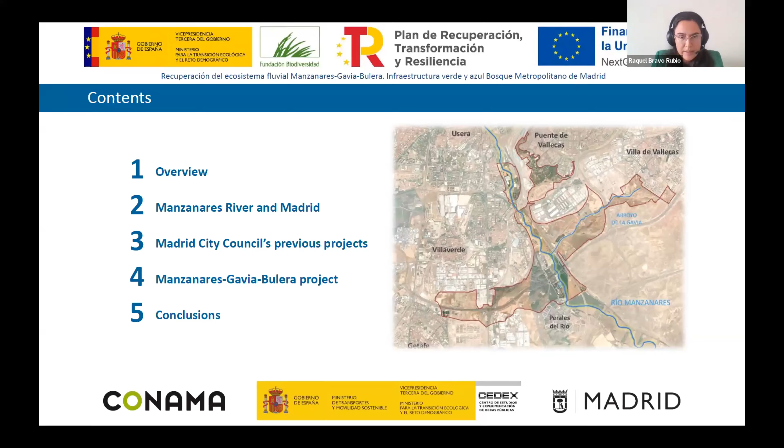Before presenting the Manzanares-Gavia-Bulera ecosystem restoration project in detail, I would like to briefly outline the structure of this presentation. We will begin with an overview of the city of Madrid, as well as its historical relationship with the Manzanares River. This background will help frame the significance of the restoration efforts made, and we will then move on to describe the project itself, and finally we will reflect on the conclusions.

Madrid is the capital and largest city of Spain, strategically located in the heart of the Iberian Peninsula. The city itself has a population of around 3.5 million inhabitants, while its metropolitan area is home to nearly 7 million people, making it the second largest metropolitan area in the European Union, just after Paris. Within the urban area, the municipality of Madrid boasts more than 6,000 hectares of green spaces, providing residents and visitors with extensive opportunities.

One moment, sorry, Raquel, your microphone is working a little bit badly. Is it possible to move it closer or to speak a little bit slower, because we are hearing you a little... I'm sorry, I'm going to move now. Do you hear me? Okay. Well, I think so now. I'm sorry, say a longer sentence.

6,000 hectares of green areas. Because you are falling a bit in and out. Is there a possibility to detach this microphone? I'm going to detach the microphone. Okay, I hope it works without the microphone. Sorry, thank you. Now, do you hear me? Much better, much better, thank you. Sorry, because we have been testing before the seminar, but sometimes problems happen.

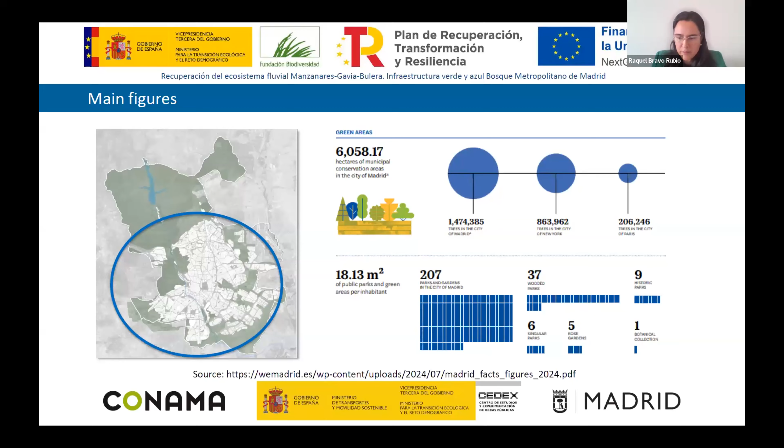Sorry, I will continue. I was explaining that in Madrid we have more than 6,000 hectares of green areas and 1.5 million trees inside the urban area. Outside we have more trees and more green areas.

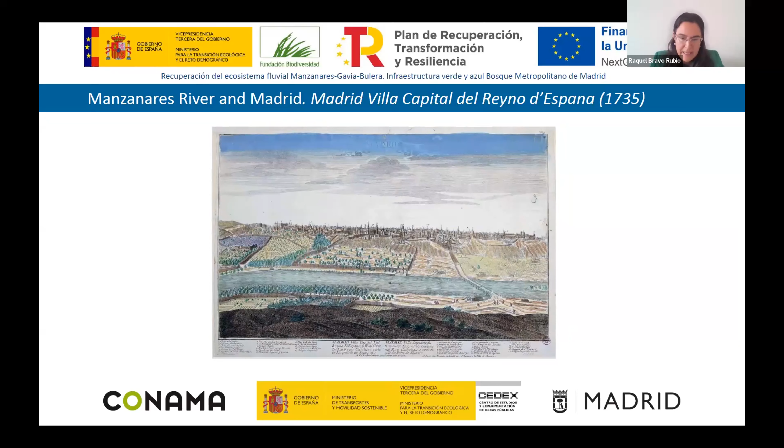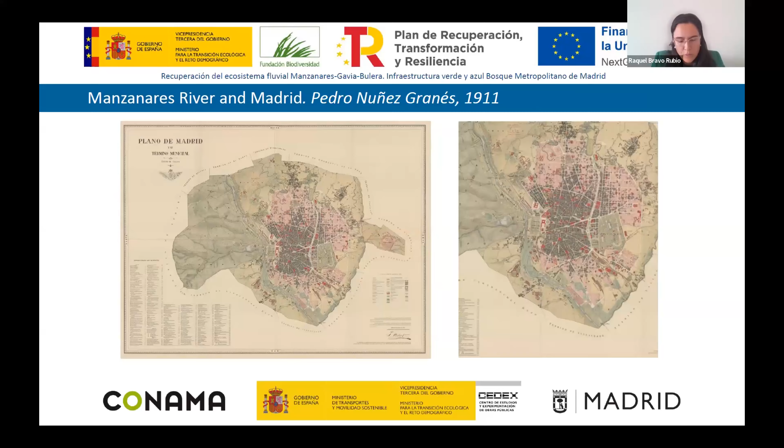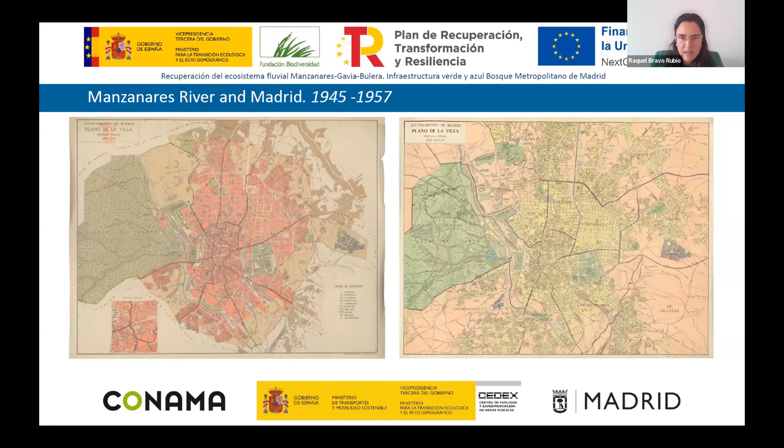Shown in this map is the early 20th century. The Manzanares River was still not fully integrated into the urban fabric of Madrid. This map illustrates the significant expansion of Madrid during the mid-20th century, when the city absorbed several neighboring municipalities. This period marked a turning point in Madrid's urban development, as the Manzanares River, which had historically remained on the outskirts, became fully integrated into the city structure, as you can see in these two maps.

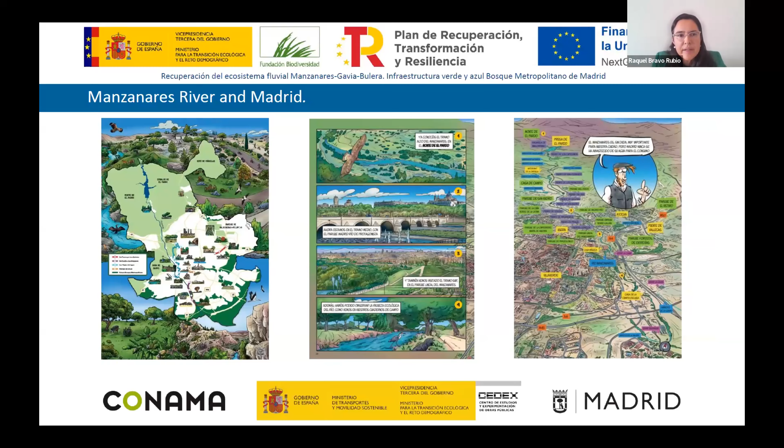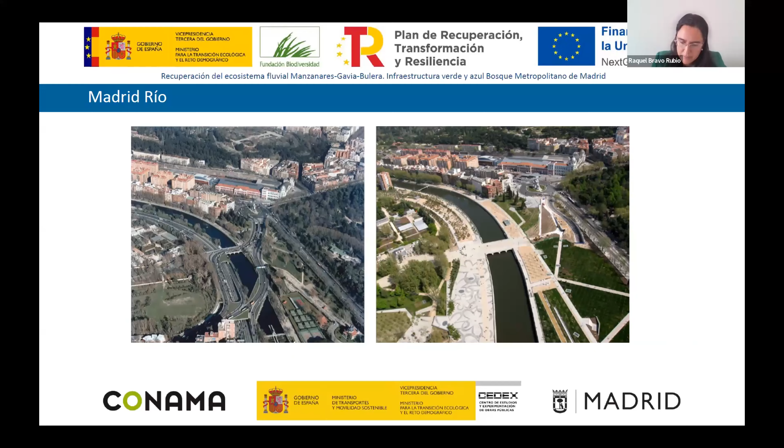We will start with Madrid Rio. Madrid Rio is a large-scale urban transformation initiative that reclaims the banks of the Manzanares River, turning a former highway corridor, seen in the left part of the slide, into a vibrant green space. This highway divided the city and isolated the river, and its removal allowed the creation of a 10-kilometer long linear park.

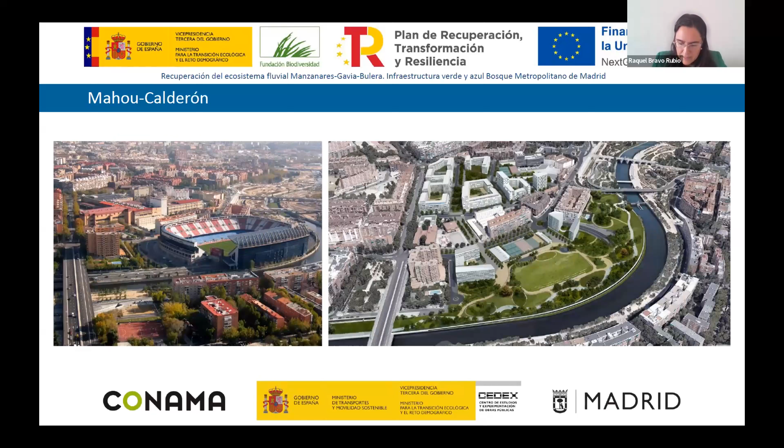You can see here a lot of benefits this generates for the city. This linear park now connects various neighborhoods and recovers the essential role of the river for citizenship. Here is another part of Madrid Rio. Finally, Madrid City Council is working to improve the connectivity of Madrid Rio with Casa de Campo, the biggest green area of the city.

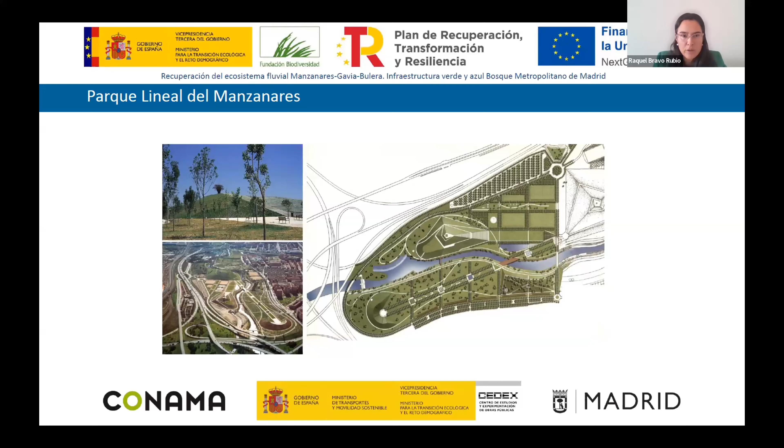We have also made another important action on the river before the project we are developing now, called Parque Lineal del Manzanares. It's another blue and green infrastructure project that complements Madrid Rio. The park is structured around three main elements: the river itself, a central pedestrian axis, and a grid of orthogonal paths. This park not only provides a recreational space, but also plays a crucial role in environmental restoration and connectivity. Now I will explain what we are doing in the Manzanares Gavia Bulera project.

This project is included in a bigger project called Bosque Metropolitano, and is part of the Madrid 360 environmental sustainability strategy. It consists of an extensive green and blue infrastructure that connects the current green zones of Madrid, implementing new plantings of native and local species. It is a crucial instrument in the greening strategy of Madrid, contributing to objectives such as forming a green belt around Madrid and improving the health and well-being of citizens.

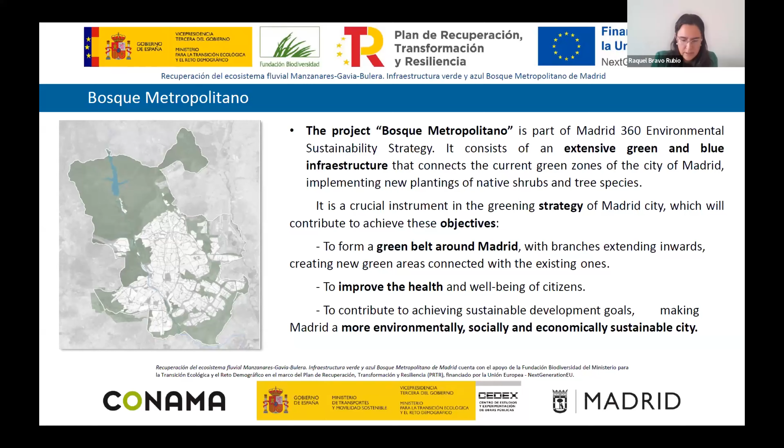Of course, it also contributes to achieving sustainable development goals, making Madrid a more environmentally, socially, and economically sustainable city. The development of the mosaic of landscapes that make up this green and blue infrastructure among the largest forest masses that embrace the city is noteworthy.

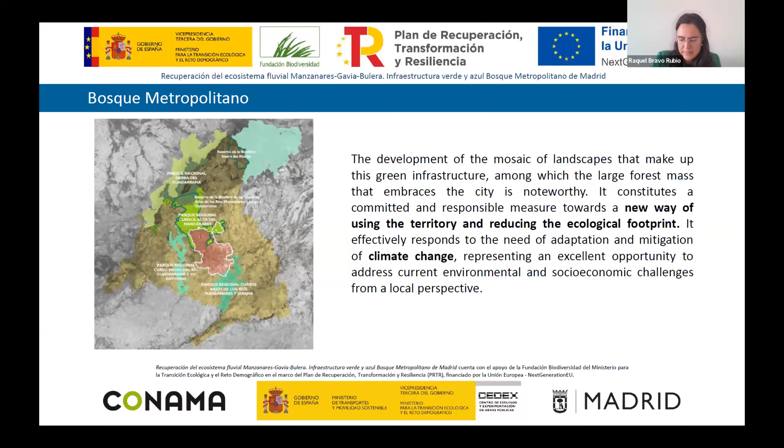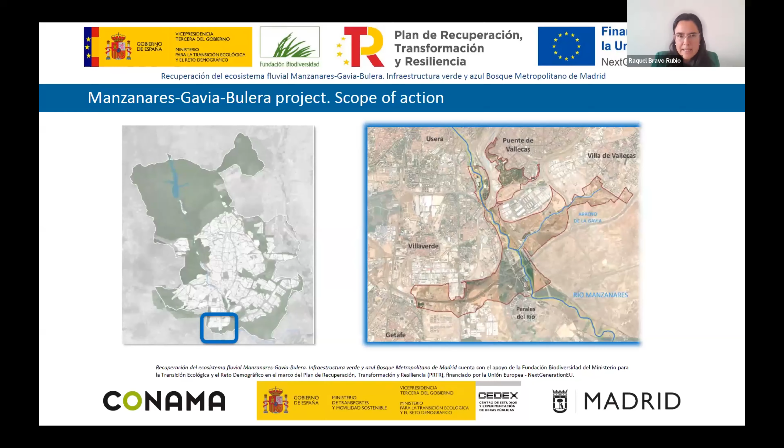Now I will explain the details of the Manzanares Gavia Bulera project. This project is being developed in the south part of our city. You can see the area here. Now I will briefly explain some relevant issues to consider in this area.

The project is developed on a section of the Manzanares River with a high concentration of infrastructure, sanitation facilities, spillways, and transport infrastructure such as railways and motorways. With regard to the infrastructure that affects hydromorphological quality, it should be noted that in this section there are 19 spillways.

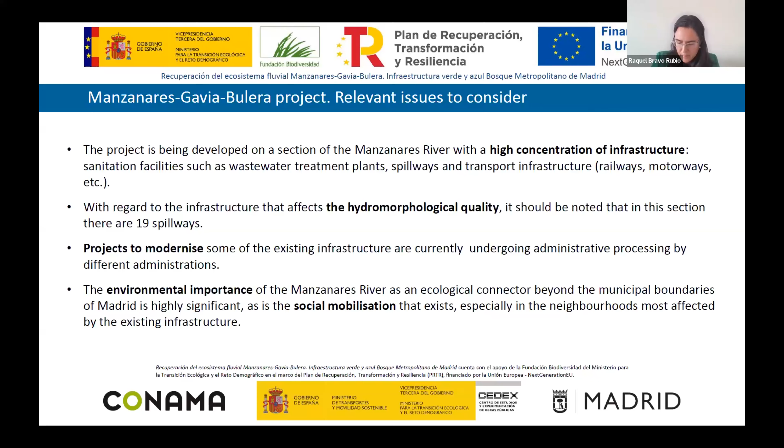We are working on one of these spillways as a demo site, with an innovative solution that Marta will explain afterwards. Projects to modernize some of the existing infrastructure are currently undergoing administrative processing by different administrations. Finally, the environmental importance of the Manzanares River as an ecological connector, beyond even the municipal boundaries of Madrid, is highly significant, as is the social mobilization that exists, especially in the neighborhoods most affected by the existing infrastructure.

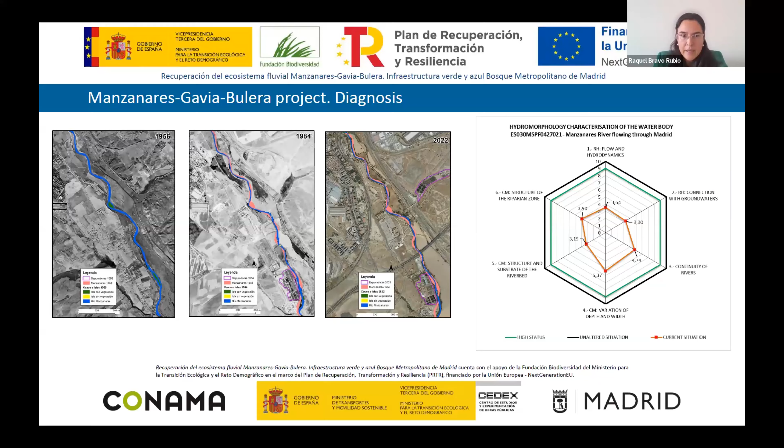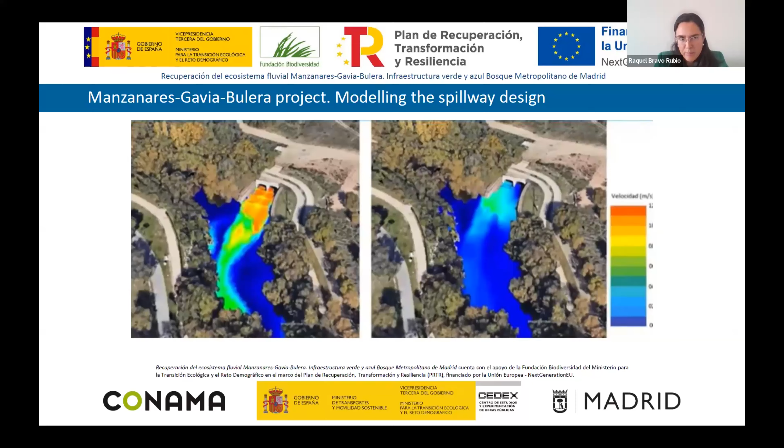Also, with this innovative design, we started modeling with the Center for Public Work Studies and Experimentation to check that the new design will fulfill the objectives we need to achieve. Marta will explain the new design afterwards.

For us, the governance of the project is very important. We consider this project an example of joint work focused on cooperation between national, regional, and local administrations, with civil society and academia. The governance program is organized in 3 working groups in which all the stakeholders are represented.

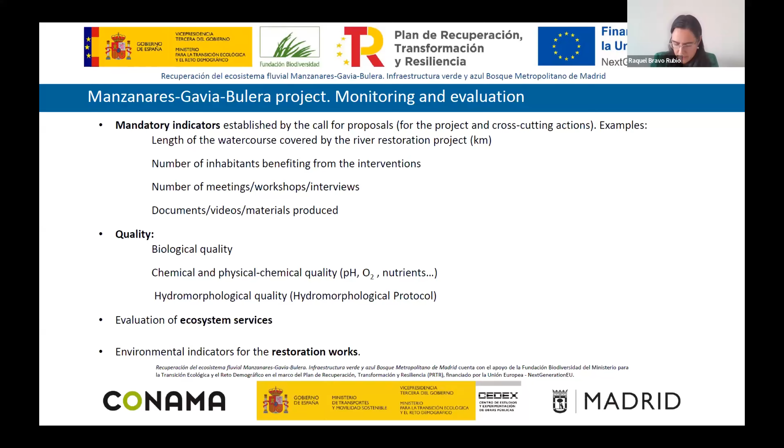As part of the project, we have a comprehensive monitoring and evaluation program established to ensure the effectiveness and transparency of intervention. This includes the systematic tracking of mandatory indicators defined in the funding call. In addition, the program assesses the biological, chemical, and hydromorphological quality, evaluates the ecosystem services, and monitors environmental indicators related to the restoration work.

This leads me to some brief conclusions. Madrid City Council has developed several important projects to improve connectivity along the Manzanares River, such as Madrid Rio, Manzanares Linear Park, and the Manzanares-Gavia-Bulera project. The project Bosque Metropolitano is part of Madrid 360 environmental sustainability strategy.

It consists of an extensive green and blue infrastructure that connects the current green zones of the city of Madrid. The Manzanares-Gavia-Bulera River Ecosystem Recovery Project, located within the Bosque Metropolitano project, is being carried out on the final stretch of the Manzanares River in the city of Madrid, where various administrations are working simultaneously to improve the river ecosystem and promote the important role of the Manzanares River as an ecological corridor in the region of Madrid.

The project incorporates a new approach to multi-level governance, promoting collaboration between the administrations, academia, and citizens. Furthermore, and finally, it is an example of the new approach to urban planning and how Madrid City Council is tackling the management of European funds, taking advantage of the opportunities offered by the European Union for developing pioneering projects using nature-based solutions. Thank you very much.

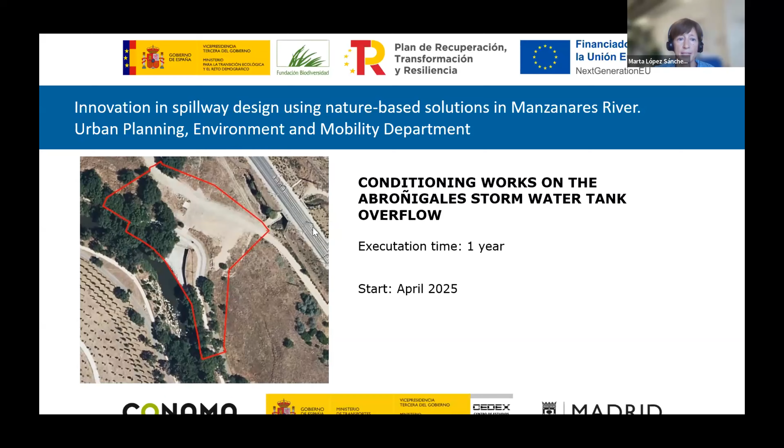Not only was this a hard solution, it also facilitated the water flow, and that's a problem when the flow rate can reach 140 cubic meters per second.

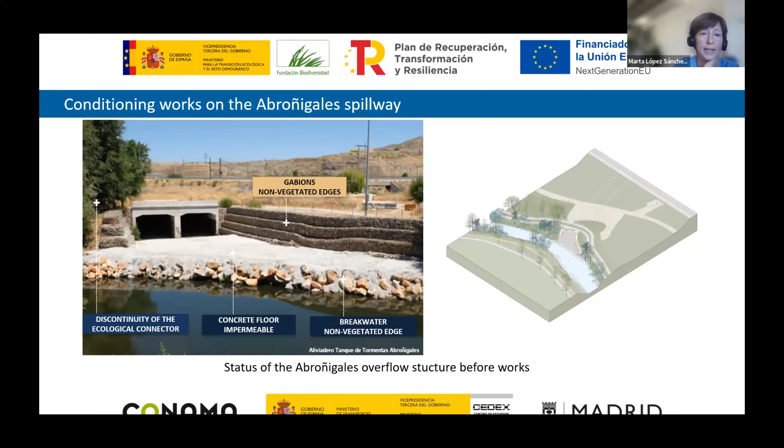So we wanted to prevent people from approaching this slope.

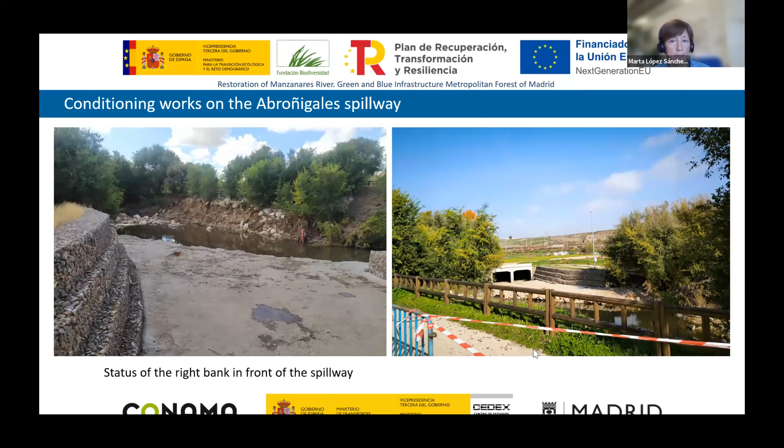Here is the status of the Abroñigales overflow structure. In March, it was a historic rainy month. It wasn't torrential rain, but it didn't stop raining for days, so when we began the works, the water table was very high, which made the beginning difficult.

The goals of the project were to delay the discharge point as far as possible, moving it away from the riverbed. For this purpose, we have demolished 25 meters of these collectors, gaining space.

In this gained space, we can build the dissipation elements we need to soften the water outlet. So a buffer basin has been designed, with rough surfaces and baffles to reduce the energy and the speed of the pouring water.

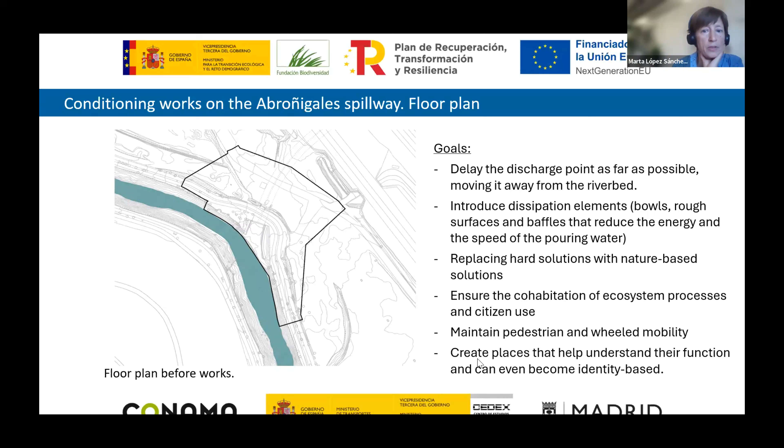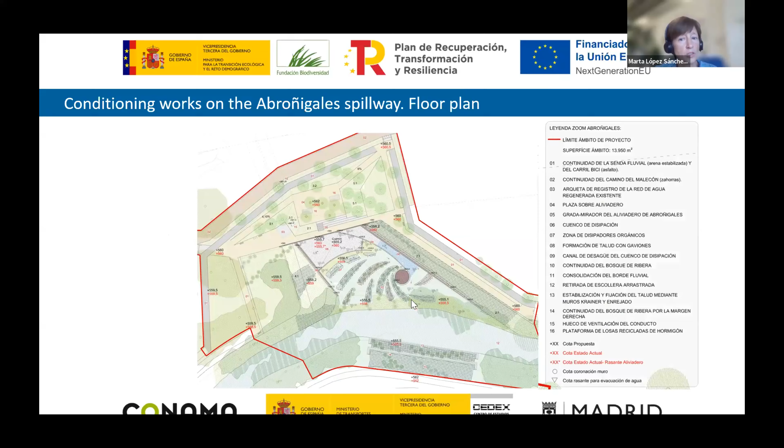It was before about 25 meters, and now it's going to be 150, which will also soften the water outlet.

Here you can see how this is going to be planted in order to give continuity to the riparian forest, and we will also have fig trees, almond trees, and Mediterranean trees.

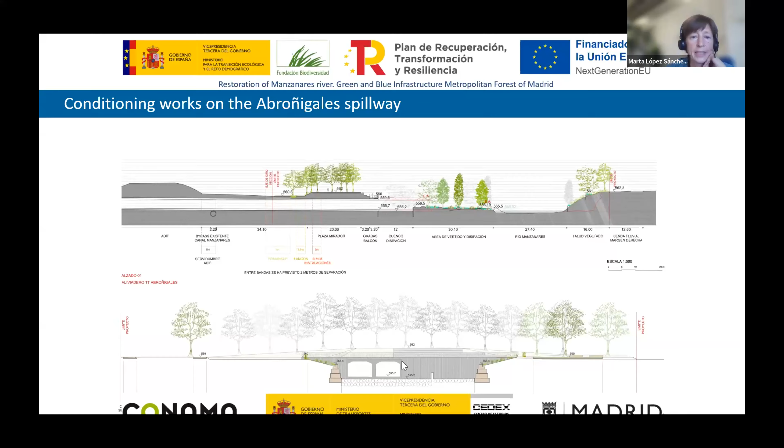This is the front view. The water can also go out; there will be windows in this wall at ground level, just to empty the buffer basin.

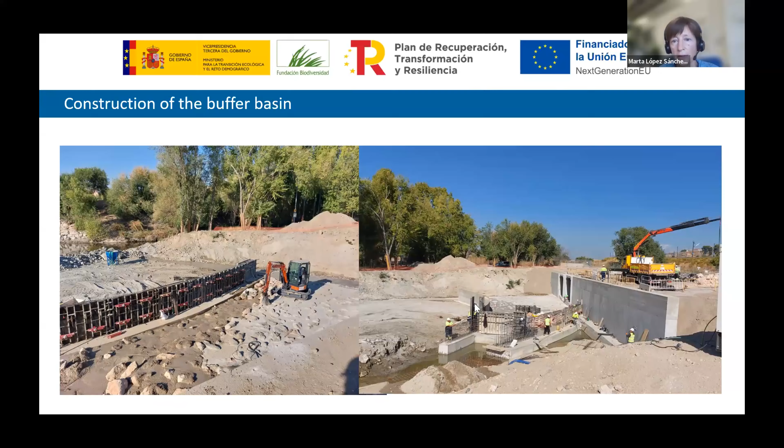Here are some photos taken in October. You can see the buffer basin - this is the construction of the buffer basin, the riprap, and the walls of the buffer basin.

The next thing to do was - here are the windows I just told you about - and the next thing is the construction of the gabion walls.

But the companies that do that work are now very busy in the eastern part of Spain, so they are going to delay the work here. So we have begun with the organic elements made of riprap, topsoil, and plants.

We want to plant in November.

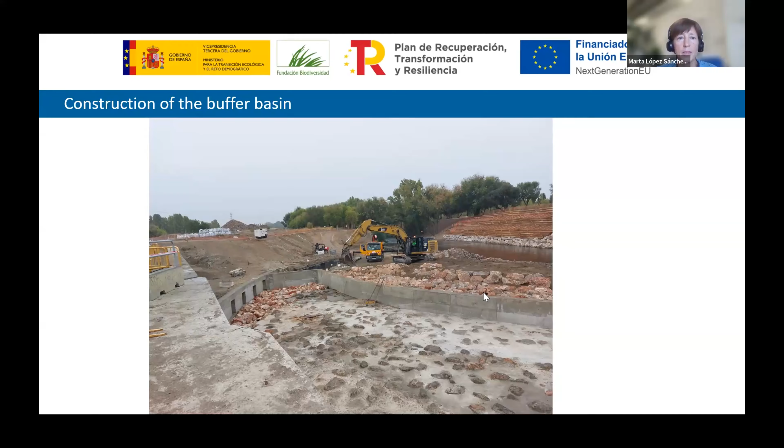As I have told, this is something we cannot forget - this is the relief of a sewage network. So we needed to adopt other measures, like these gratings, in order to avoid solids escaping to the river.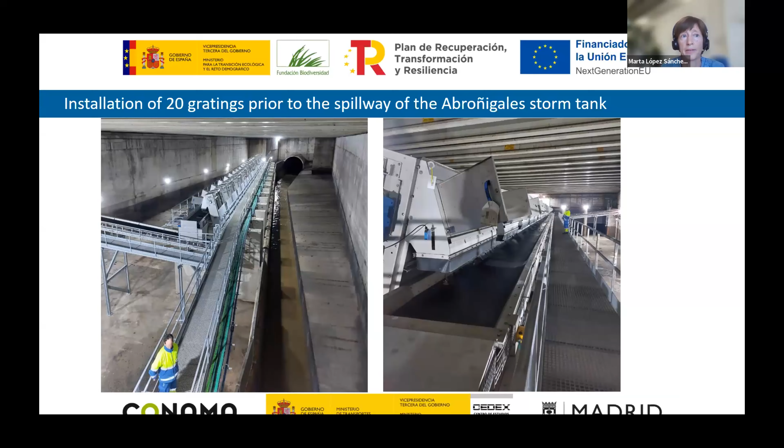You can see there is vegetation. It's a nature-based solution that is not going to mean a discontinuity as it was before.

Let's talk now about the restoration of the right river bank that was eroding. Here you can see, as before, the area of action. The riprap was on the riverbed, as you can see. We started these works in June, and they are going to last 6 months.

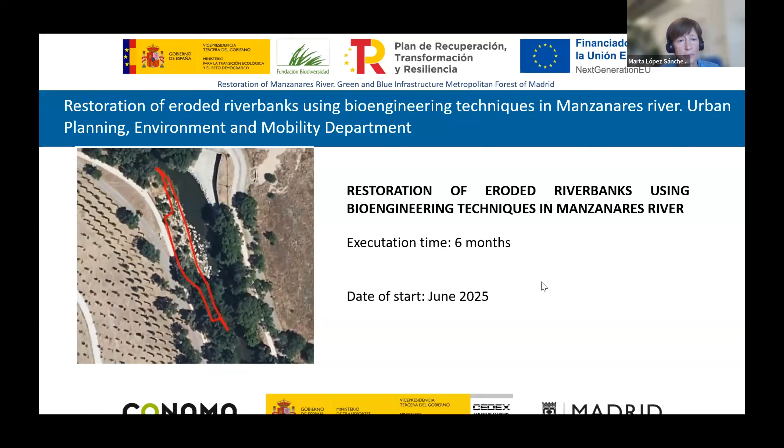The design of this stabilization is with crib walls. This is the solution I was talking about. We are going to use bioengineering techniques.

First of all, we needed to stabilize the slope, and we put the riprap we have taken from the riverbed. And after all, we have used this debarked pine wood trunk.

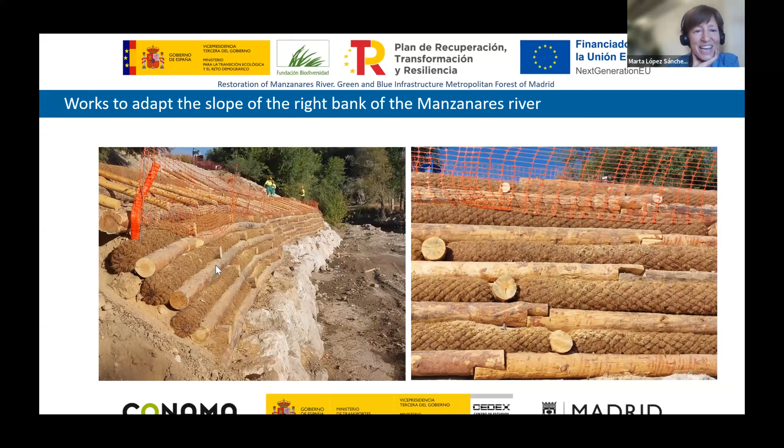And we began in September with these artisanal works. You can see here the pine trunks. Between them there is a slope, so we have to put a coconut bio roll in order to avoid the soil going out. And another we put in perpendicular. I don't know if this word is English. We put this other trunk.

And after all, we are going to use live cuttings of native species. And these logs are secured with nails and steel bars.

We will plant in November tamarisks, elms, and shrubs, and bramble, and elderberry, which are the plants that we can find around the river.

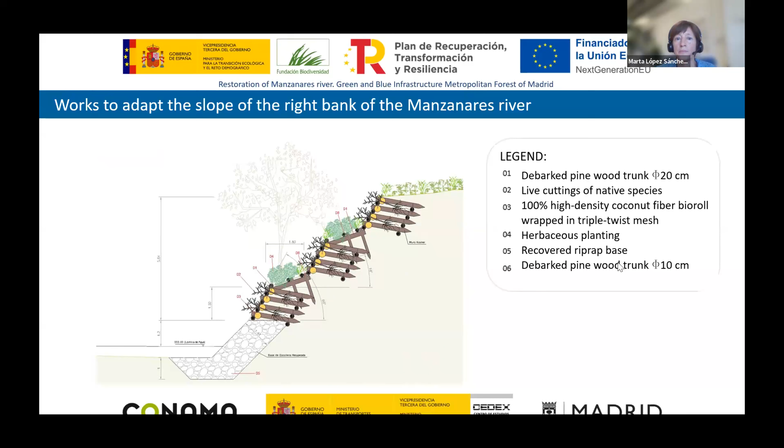Here you can see how they are putting the soil, and well, that's all. Thank you for your attention, and I apologize if my English is not so good.

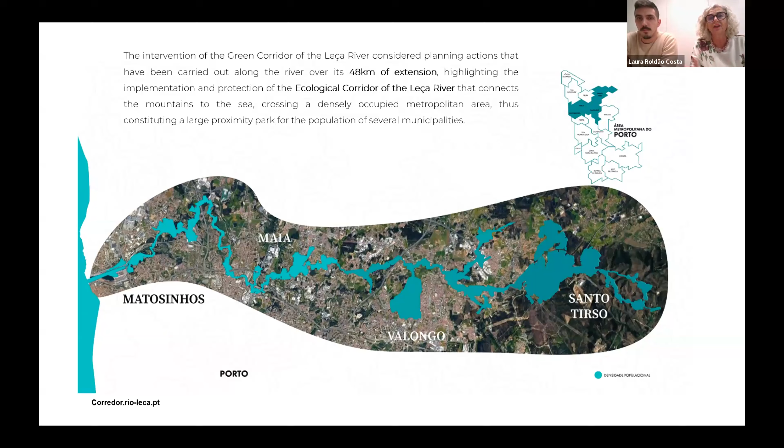This river is in the metropolitan area, so 1,700,000 inhabitants have direct contact with this green area, with this blue system, and the mobility is also very important because there are a lot of people crossing this river every day.

So we began to work in one part of the Matosinhos municipality in a small scale project, and we also began to work in a large scale doing a master plan, because it's necessary to see the perspective of the basin of the river combined with the small perspective of the project. So we work at the same time in different scales, which gives us a very good perception of the problems of the river and where the major problems are.

So we studied at the metropolitan level and the local level. You can see the diagram of the master plan in this image.

We also have workshops with people to know exactly what they think and feel about the river. These workshops are based on visual preference analysis. We do inquiries with young people, because they are the ones who will live in this area, and it's interesting to understand their vision for the river. We also do workshops with technicals, because they are the people who can take action now in the different municipalities and entities.

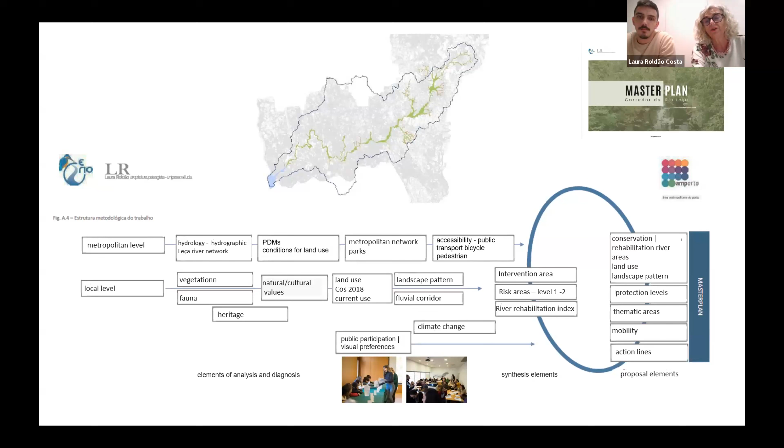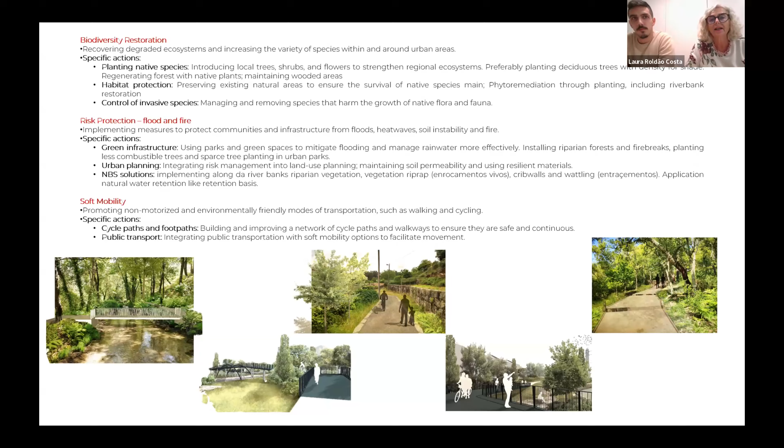This methodology and the master plan—we finished the master plan in 2020, and we have a lot of guidelines, goals and strategies for the whole river. We define some topics; I won't read everything, it's too much text, but they include biodiversity, risk protection, soft mobility, consolidation of the green corridor, and the qualification of the landscape.

As I told you, there's a lot of requalification needed along the river due to problems with climate change. It's necessary to prepare the space for these problems. And of course, since we're in a metropolitan area, we also need recreational spaces.

So we define all these goals and exactly where these interventions take place in the master plan. You can see in the blue circles some thematic areas where we pretend to do environmental formation—talking about the evolution of the landscape, the heritage. There is a lot of heritage along the river—or areas for research about the quality of the water.

The results of the lines we are implementing—so we have different areas, and it's also very important to have places for pilot areas, to explain how we can have a sustainable forest and sustainable agriculture, because they interfere directly with the river.

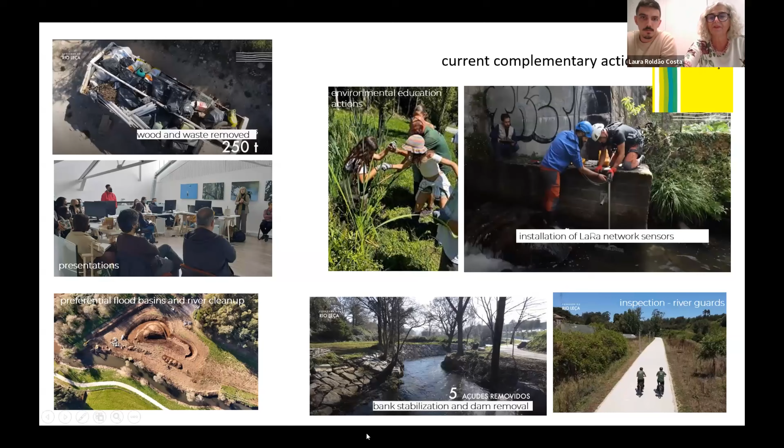I pass this presentation to my colleague Antonio to explain some of the areas where we implemented the project. Thank you, Laura, and good morning everyone. I'm going to talk about our project around the Leça River, starting with some images of the previous situation.

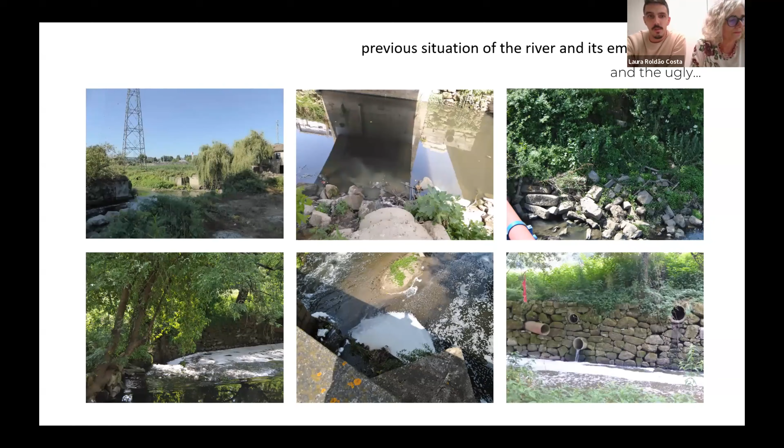So some of the intervention from our side is to try to mitigate and reduce these big problems.

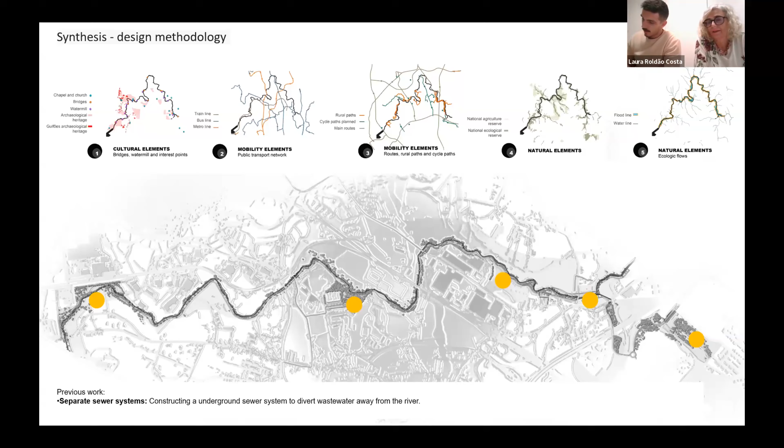As Laura explained previously, we worked on a master plan for the Leça River across the 4 municipalities. With this methodology, we already had a lot of information when we started the project. We looked at the cultural elements, the mobility elements, and the nature elements. It's important to connect and create a green infrastructure along the river, so we also looked at possible connections to existing parks and future parks, as this connectivity is very important.

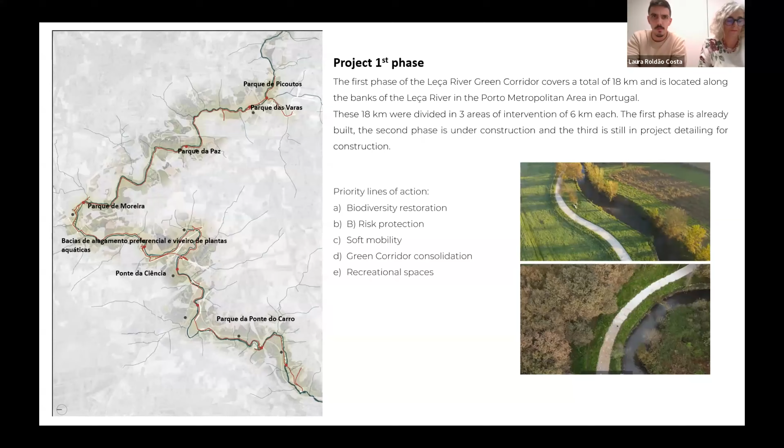Antonio, 2 minutes. Thank you. Okay, I'll try to be fast.

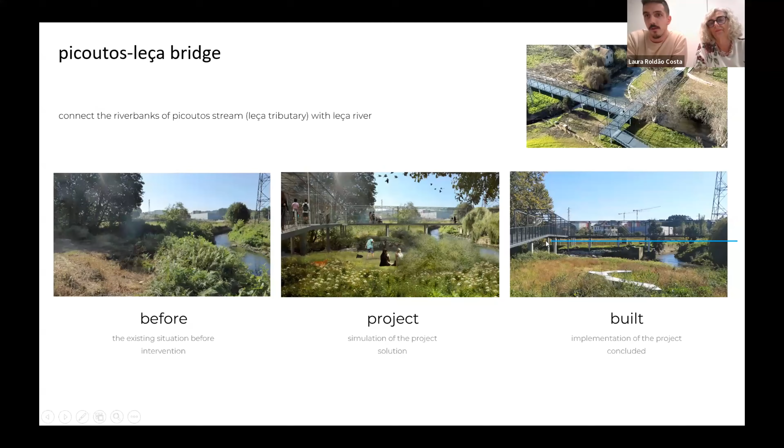What you're seeing here are the bridges, because connectivity between the spaces is very important. All these connections are accessible to people in wheelchairs, very easily accessible. These are very permeable bridges, built above the highest flood level for 100 years, so these bridges are never under water.

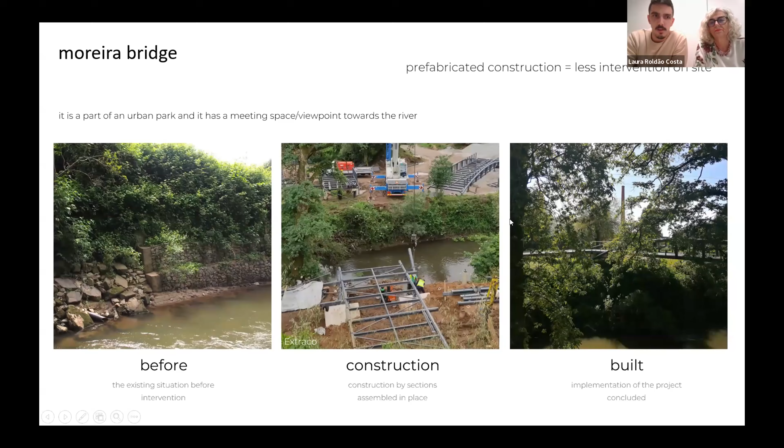You'll see here some of the elements where we connect the bridges. We create spaces for people to connect with the river. We also try to ensure these bridges don't interfere a lot with existing vegetation. You'll see further in the next images the meeting points of people with the river.

As I said, we try to respect the existing vegetation, so you'll see we maintained a lot of the trees, the riprap, and the dynamic of the seasons around the year.

This project also has to consider flood resiliency. The materials have to be permeable and strong, because the Leça River, most of the year, doesn't look like much, but when it rains a lot, it has very severe floods. So every intervention has to consider this.

We also create, as you'll see further, water basins. As I said previously, we had a lot of erosion problems, so we had to stabilize the embankments. We used live cuttings, and we also used stone for the riprap to stabilize the embankments.

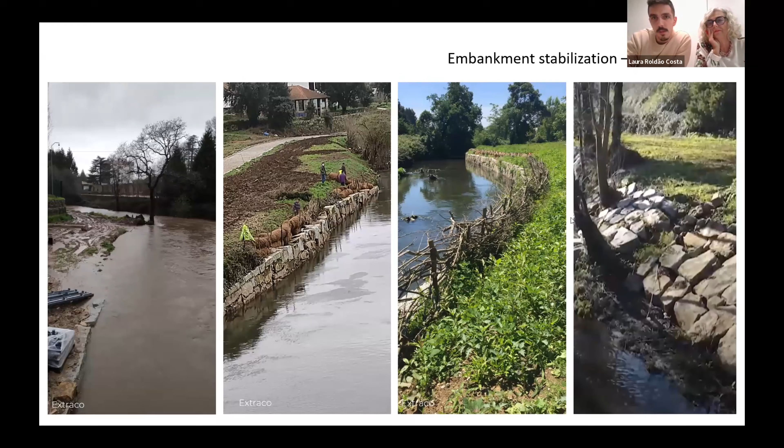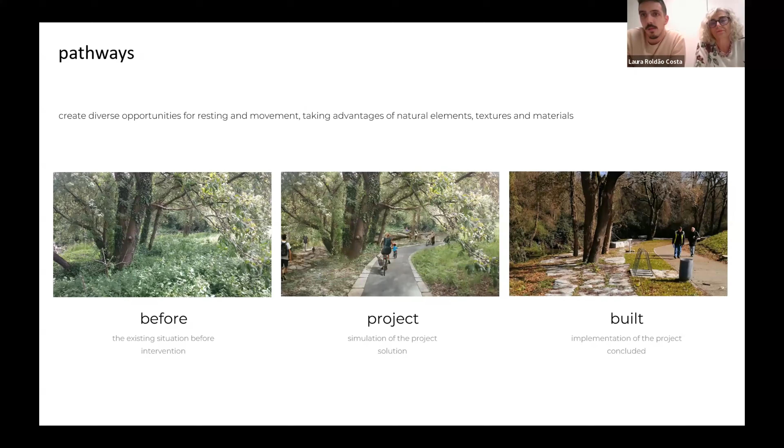I'm trying to be a bit faster, sorry if this is rushed. The pathways for people, as I said, are all accessible to people with reduced mobility and people in wheelchairs. They are permeable because we are working in flood areas, so it's very important that we don't impermeabilize the soil.

You can see here the construction, some of the construction of these spaces.

And we also work a lot with the materials from the existing site. So the trees that were cut, some of the stone, we utilize a lot in the area.

And of course, when we go into construction, there's a lot of things we don't know. So this is an example of a previous wall that existed, completely buried underground, and when we were constructing we found this.

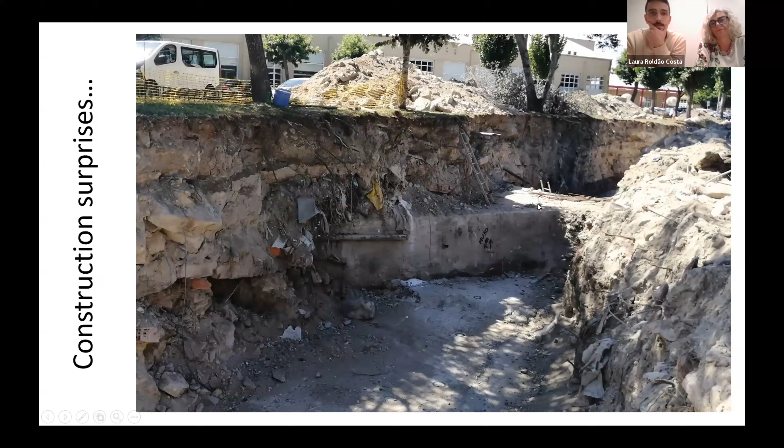So the solution here was to keep it, so we don't take this solid trash out to another place. We maintained it here, and we had to contain it with some walls. Also, there are a lot of, as you can see, visitation chambers here, so we had to contain those as well.

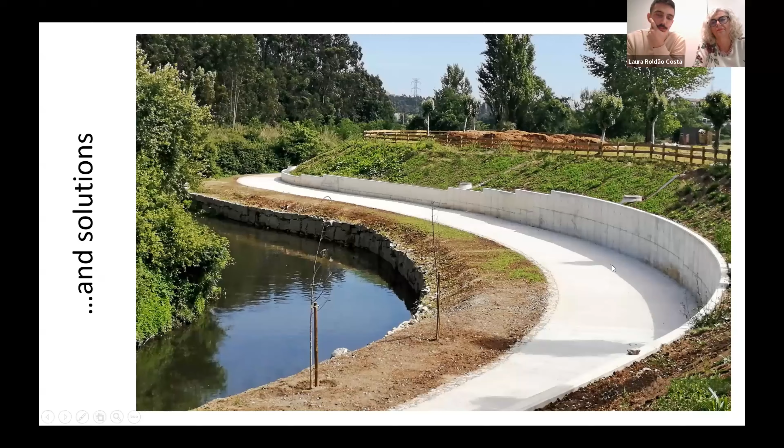And these are some of the ongoing projects, also in other municipalities, not only Matosinhos, but there are some projects in Maia, Valongo, and Santo Tirso. We expect that the rest of the corridor will be complete to start construction. The project will be completed around next year.

Some of the projects that are also ongoing are the aquatic plant nursery, to create plants from the area to plant in the area.

We are creating preferential flood basins because, as I said before, the Leça River has a very high risk and danger of floods, and a lot was constructed around the river, so this is a very big problem. And of course, we are also creating urban parks with ponds, infiltration, and biodiversity, to connect all this green corridor.

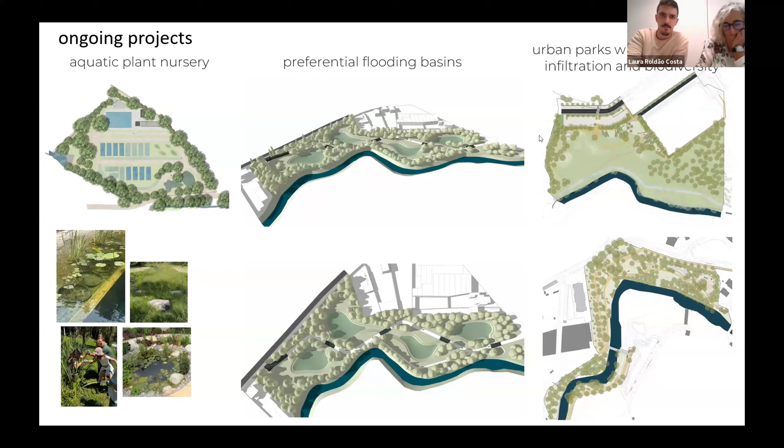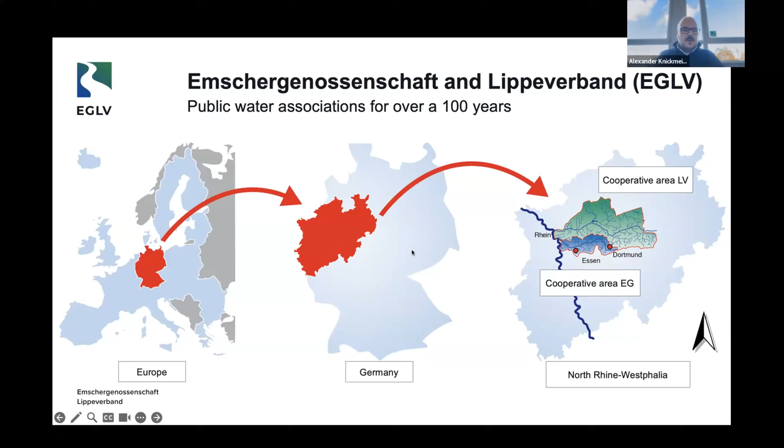And the Lippe shown in green further here in the north. Here you can see this in more detail. As mentioned, in the north is the Lippe and in the south the Emscher with its small tributaries, which together mark our catchment area. The catchment area covers about 4,000 square kilometers, and we provide water management services for around 3.6 million inhabitants.

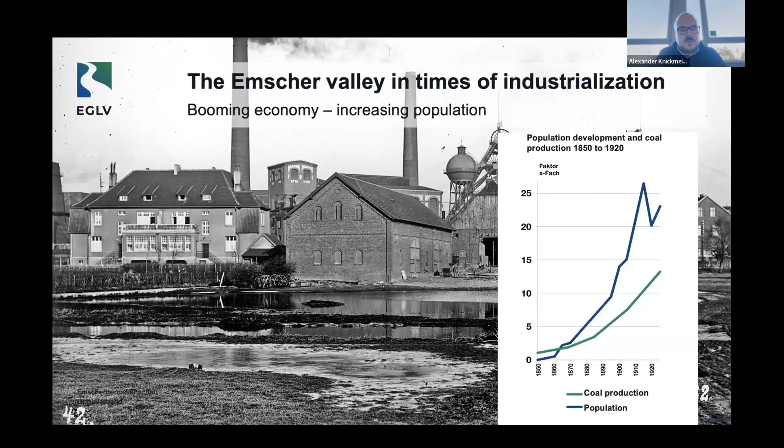And so, by order of the Prussian parliament at the end of the 19th century, the Emscher Genossenschaft was founded to end this situation, with the mission to dike the Emscher and transform it into a canal through which wastewater could flow and be directed above ground as quickly as possible towards the river Rhine.

So here on the two photos, you can see that the construction of this new wastewater system led well into the middle of the 20th century. On the left, you can see a photo from the 1950s, and on the right, a color photograph showing what this looked like in the urban district in the 1990s.

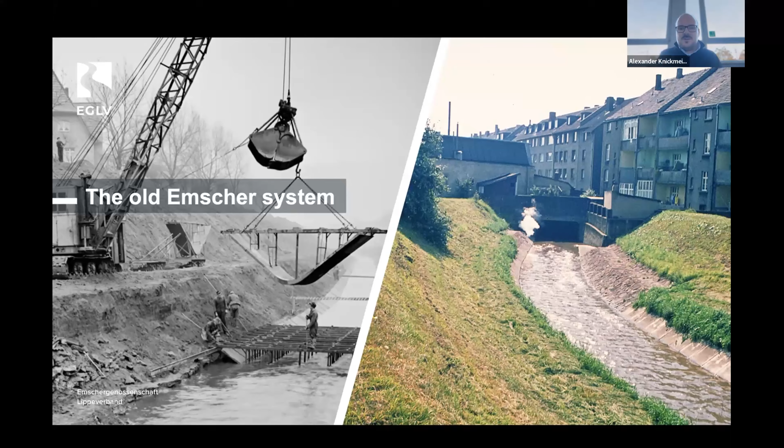You must imagine the Emscher and its tributaries as open wastewater channels that flowed directly through residential neighborhoods. It was also very visible that the districts along the Emscher were the poorest and least attractive ones. You can almost see in the photo on the right that the neighborhood literally turned away from the rivers. Normally in urban planning, you see the opposite — people are drawn to the water and areas near rivers are considered attractive places to live. But here, the backyards of the houses faced the Emscher. You can imagine that when you open the window in the morning and look onto an open wastewater channel, it's not exactly the most pleasant way to begin the morning.

So the situation eventually became unbearable, and by the 1970s and 1980s, people in the region were discussing how to deal with the industrial heritage. Many industrial buildings were renovated, preserved, and reused, for example for cultural purposes, in a region that wanted to move forward with this industrial heritage as part of structural change. The open wastewater of the Emscher, running like a brown band through the region, was no longer suitable or desirable. So something had to be done.

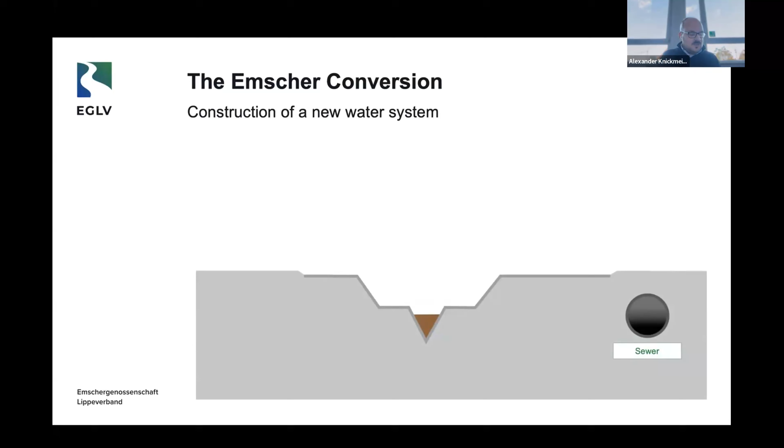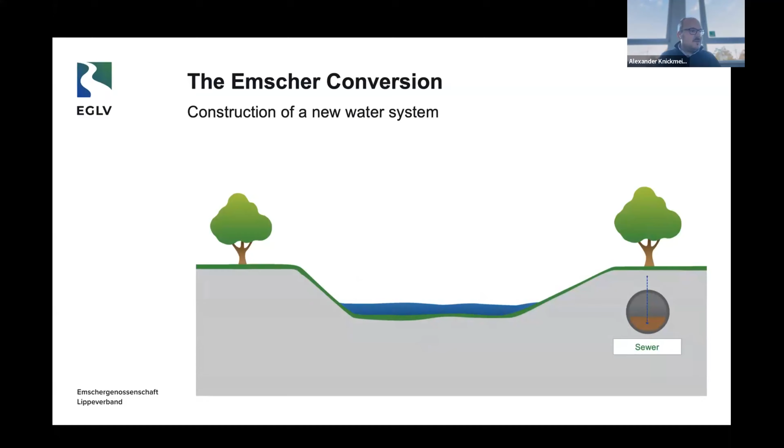What sounds small here on the slide was in reality one of the largest infrastructure projects in Germany, with a budget of 5.5 billion euros. In total, over 400 kilometers of sewers were built, more than 300 kilometers of river were restored to a natural state, 4 new large wastewater treatment plants had to be built, and a whole series of pumping stations were constructed or modernized.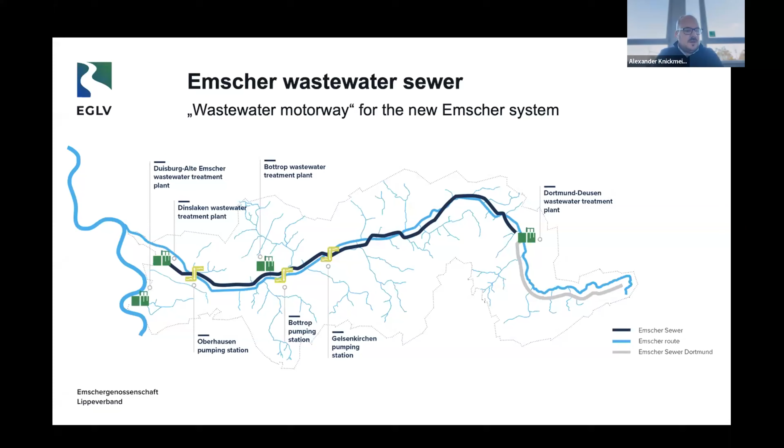To give you a very fast impression of these treatment plants, here you can see this, and also the large pumping stations we had to build. These are structures that go 40 meters deep into the ground and have a diameter of 40 meters as well. To my knowledge, they are among the largest wastewater pumping stations in Europe — just to give you an idea of the dimensions.

As I just mentioned, the region, after the end of coal and steel, set out to deal differently with its industrial heritage — to preserve it on one hand, but also to create new qualities for the region. The Emscher serves as a connecting blue thread through which one can trace the story of the region themselves, from a coal and steel region through the IBA Emscher Park, a comprehensive program for structural transformation, up to the Emscher conversion itself. We are therefore in the middle of an ongoing transformation project in which the region continues to reinvent itself.

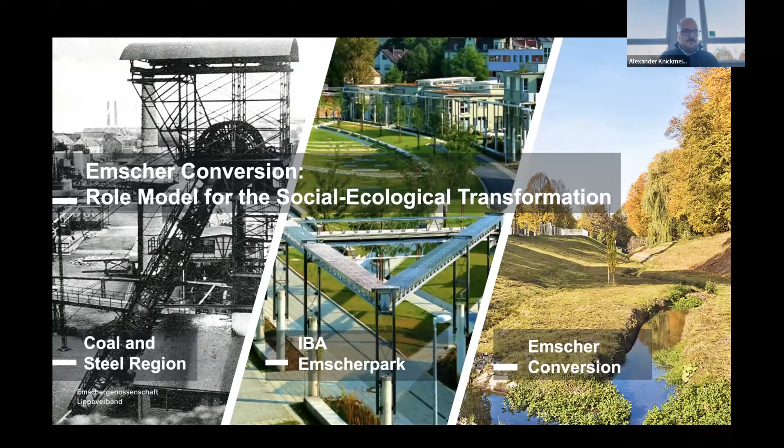And quite practically, the Emscher conversion is linked to a whole range of positive added values, which I want to give you a very brief example of.

First of all, in the field of ecology, in the restored zones of the Emscher, we were able to count more than 1,000 new species within a very short time — insects, snails, and various fish species, including some endangered ones. Even some well-known species, such as the beaver, have returned to the Emscher. In the field of economics, studies have shown that investment in blue and green infrastructure also pays off economically.

With an investment of 5.5 billion euros, we generated strong economic effects, even in times of economic crisis in the 2010s. We are able to demonstrate that an economic impact of 13.2 billion euros resulting from contracts and subsequent income effects have been generated, and we estimate that around 45,000 jobs were created or maintained during the project.

In urban development, as you have seen in the photos, there is also an impressive transformation along the Emscher. Initial calculations already show increases in property values and rent levels. Overall, the municipalities in our catchment areas now face the challenge of using the impulse of a restored Emscher for their own neighborhood development. We support our member municipalities with our expertise to unlock these added values.

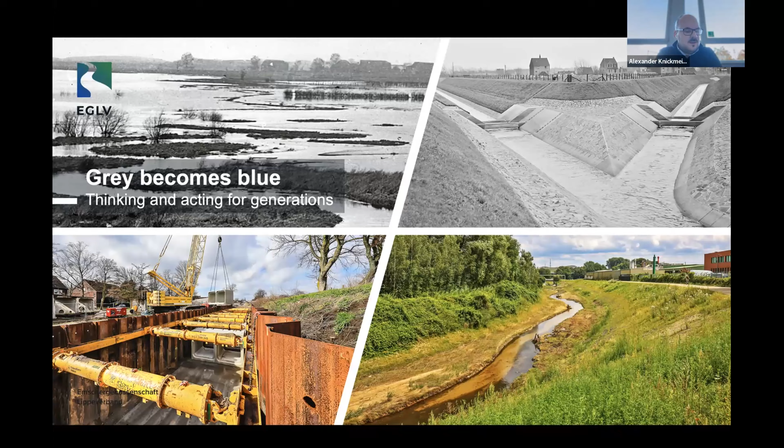So thank you for your attention. I look forward to your questions and to the discussion in the third part of our webinar.

Thank you, Alexander, for such an excellent case study project, and it really is one of the most important projects around Europe. Now, last but not least, our case study comes from Italy, from Turin.

We have the speaker, Andrea Cassi. Andrea is an architect who graduated from the Polytechnic University of Turin with a thesis on the role of digital technologies in contemporary cities, developed at the MIT Senseable City Lab. He worked and presented in leading cultural institutions such as the Venice Architecture Biennale and Triennale di Milano, and he's founder and director of AEX, a design research workshop exploring the intersection between art, landscape, and technology, and he's partner and project manager at Carlo Ratti Associati.

Well, Andrea, the floor is yours. Thank you, thank you Andres, and good morning everybody. I'm really happy to be here. So, as you said, my name is Andrea Cassi.

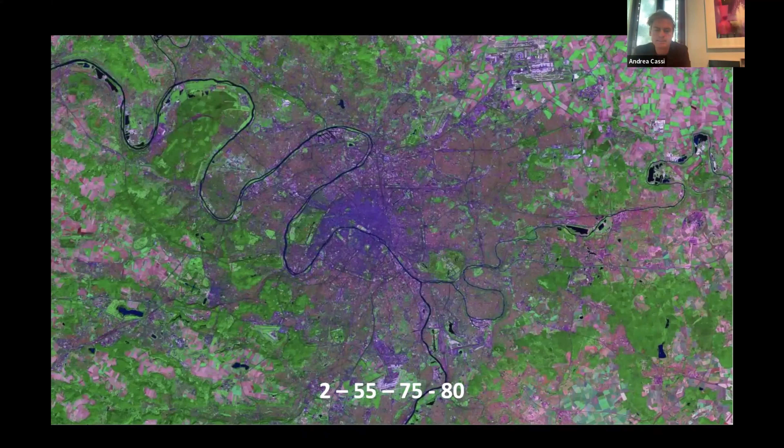The numbers you're seeing on screen refer to the impact of cities in this regard. As you may know, approximately 2% of Earth's surface is occupied by cities. 55% of the world population is living nowadays in urban environments. And cities are responsible for approximately 75% of energy consumption and 80% of CO2 production. So you really see how big the impact of cities is on our environment.

What is interesting to me in this regard is that this is forcing us, in a certain way, to think about the natural element in the city as part of its infrastructure. And it directly impacts the livability of urban space.

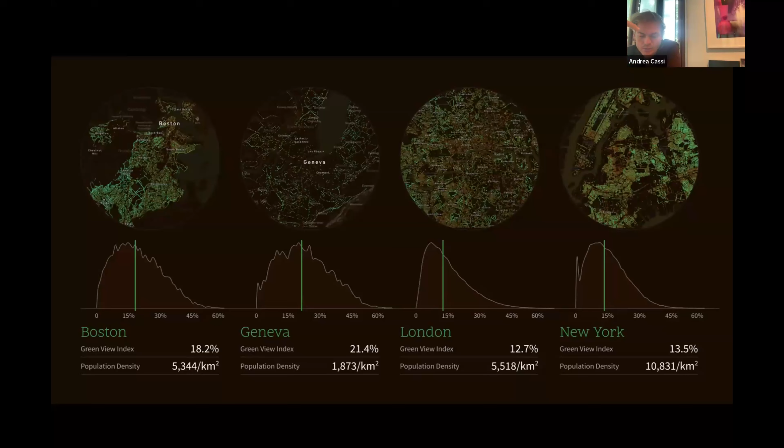This is the case of this project you see on the screen, not related to the river or what we're talking about today, but interesting as a case study. It's called the Green View Index Project, in which Senseable City Lab researchers are studying how the amount of trees impacts the quality of urban space in different cities in relation to population density.

This is important because when you consider the natural element as part of the city infrastructure, you really start to work to create exchanges and positive impact for the city and its citizens. This is what we're trying to do here in the office.

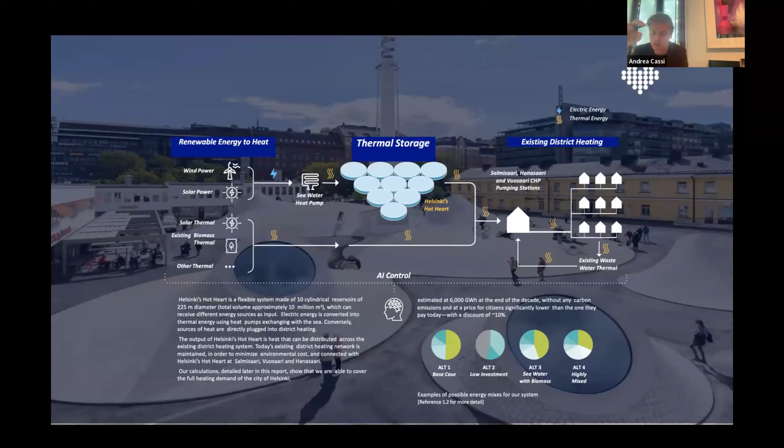The project you see on screen is a proposal we did some time ago together with Transsolar and other engineers, a big team, for the city of Helsinki. The idea was really simple: to create an energy storage system using a floating hot water basin, storing energy produced by renewable sources. But beyond the energy aspect and the technical aspect, which is interesting as well, what's more interesting, I think, is...

...that with this kind of intervention, you can really define new urban spaces, putting together natural and artificial. In this case, we were able to create a new typology of urban space using the heat we were storing in the basin. This is, in a certain way, what happens when cities consider their natural features as part of their identity.

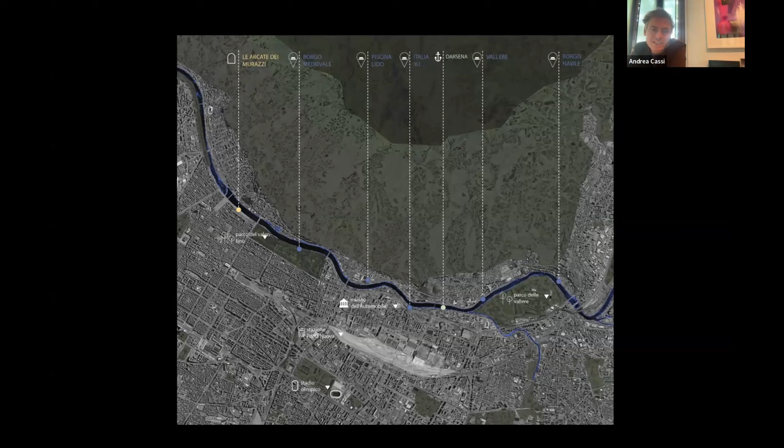So to do that, we propose 3 simple interventions, 3 different typologies of interventions, to allow the new navigation system. The first one is the creation of the so-called river center, a sort of public meeting point on the river using one of the beautiful historical structures on the riverbank in the city center.

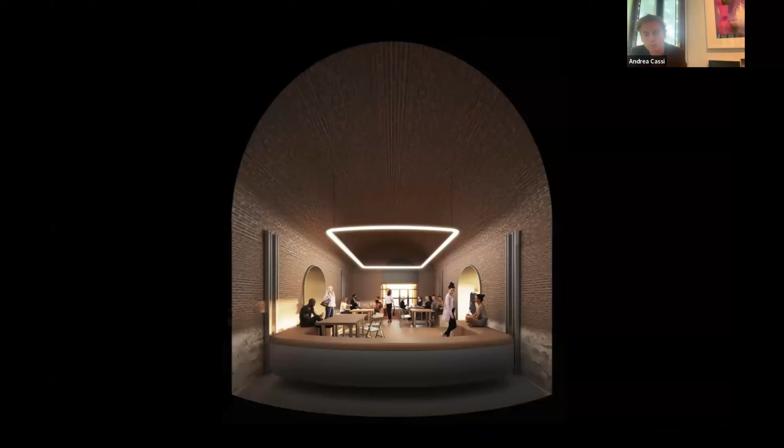And as the river floods are frequent, this of course is also impacting the way we are designing space, the way we are designing our architecture. We designed a kinetic architecture made by platforms able to adapt to the water level. So again, when the flood enters the arcade, all the platforms rise, they go up.

So again, this is an idea of the architecture that is defining a dialogue with the natural element, also in a pragmatic way, in a practical way.

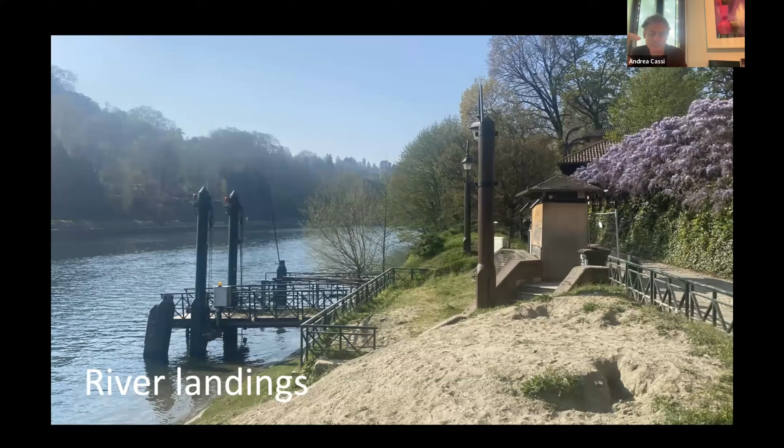The second intervention is really important because it's about the river landings. Together with the municipality of Torino, we redesigned the historical landing with the idea of having a sort of public meeting spot, transforming the old landings into open squares towards the river. So the idea is to use something technical, like the landing, to redefine the urban space and create meeting points.

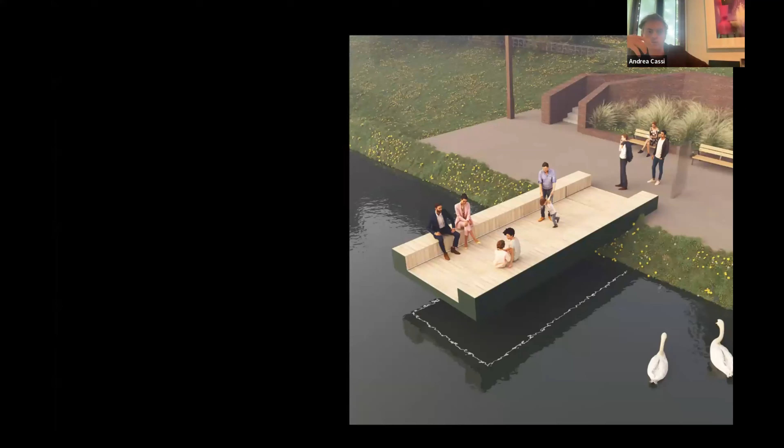We also worked with landscape designers from Milano to redesign all the riverbanks nearby the landings.

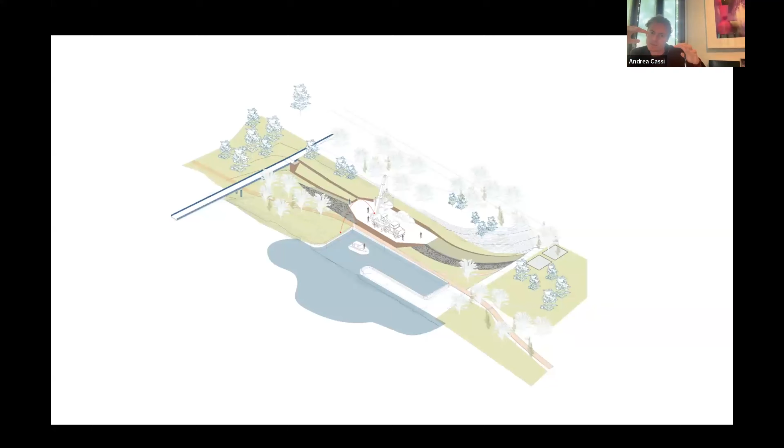And the third one, of course, is a really technical one, the harbor basin. A new basin able to host the boats during floods, because this was one of the problems of Torino with the previous project—they didn't have a basin to store the boats during floods. This is a simple, technical infrastructure in which we redesign all the landscape, so it really embeds in the existing riverbank, the existing landscape, the natural ecosystem, the new infrastructure.

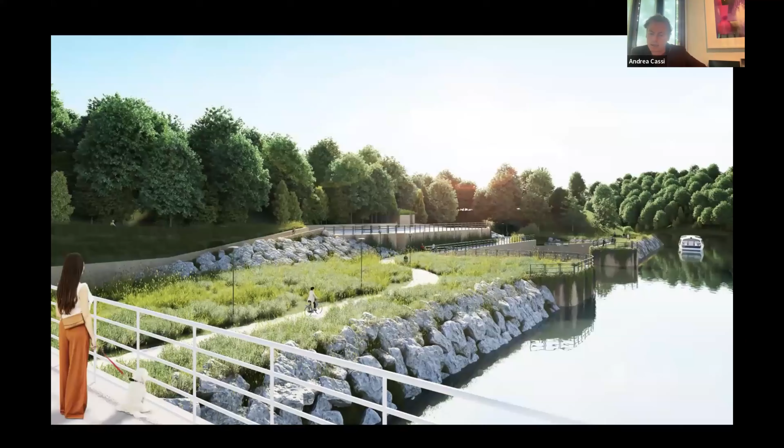Ultimately, this project is not just about building something on the river, but about changing how we relate to our rivers, trying really to connect transportation, ecology, and culture. So thank you very much.

Thank you for this explanation. Andrea is so clear about these new ideas in natural-based solutions and rivers. Thank you very much.

And now we move to the next discussion, with the 4 case studies that we have. I invite Marta from Manzanares River, or Raquel, for this discussion with the other 3 case studies. We have some key questions about rivers, restoration, and natural-based solutions.

The first one is about natural-based solutions, restoration, rivers, and climate change. I open the discussion about your feeling on how climate change impacts river restoration and how we must take action for climate change. For example, I'm thinking of the European Mediterranean countries, the cutoff low—in Spanish, DANA. Floods are a problem in many countries. What is your opinion, your experience about your project, the relationship between climate change, restoring urban areas, and water?